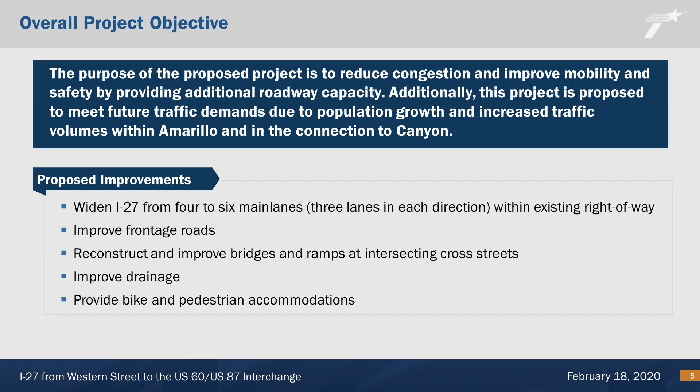The proposed improvements include widening I-27 from 4 to 6 main lanes, 3 lanes in each direction, within the existing right-of-way. Improve frontage roads, reconstruct and improve bridges and ramps at intersecting cross streets, improve drainage, and provide bike and pedestrian accommodations. The proposed project has been divided into 2 sections, a north and south segment.

The north segment consists of 5.1 miles of I-27 from Western Street to south of Sundown Lane. Some of the project considerations for this segment includes Western Hillside intersection alternatives, curbed frontage roads, closed drainage, ramping modifications, bike and pedestrian accommodations.

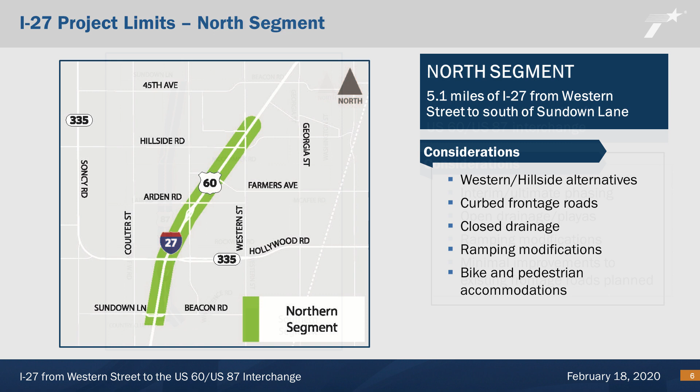The south segment consists of 5.5 miles of I-27 from south of Sundown Lane to south of the US 60 US 87 Interchange. Some of the project considerations for this segment includes interim and ultimate phasing, open drainage or playas, ramping modifications, minimal improvements to existing frontage roads are planned.

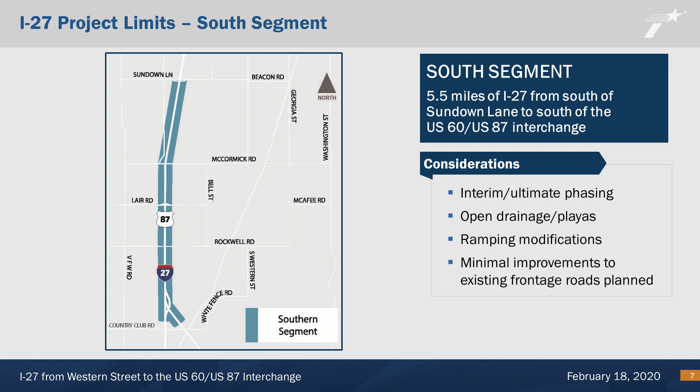The project would be performed in different phases. The interim phase would consist of performing widening work in the median, making entrance-exit ramp modifications, upgrading the frontage road and access in the north segment, modifying the Hillside Western Interchange, and having 6 lanes on I-27 in an interim configuration on the south segment from Sundown Lane to the US 60 US 87 Interchange.

The ultimate phase consists of the completion of widening I-27 to 6 lanes in an ultimate configuration from Sundown Lane to the US 60 US 87 Interchange. In addition, intersection modifications would be performed along I-27 at the Sundown Lane, FM 2219, Lair Road, and Rockwell Road intersections, as well as improvements to the State Loop 335 interchange.

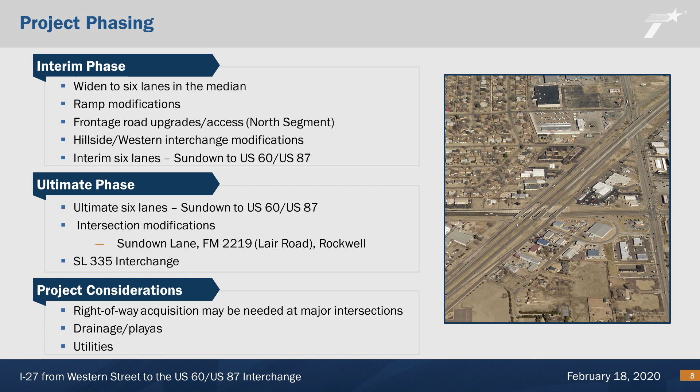Throughout the project, the team will keep the following project considerations in mind. Right-of-way acquisition may be needed at major intersections, drainage or playas, and utilities.

The existing and proposed improvements to I-27 in the south segment, from south of Sundown Lane to south of the US 60, US 87 interchange, are shown here. The existing configuration includes 4 main lanes on I-27, 2 in each direction, and 4 frontage road lanes, 2 in each direction. The existing right-of-way is 300 feet.

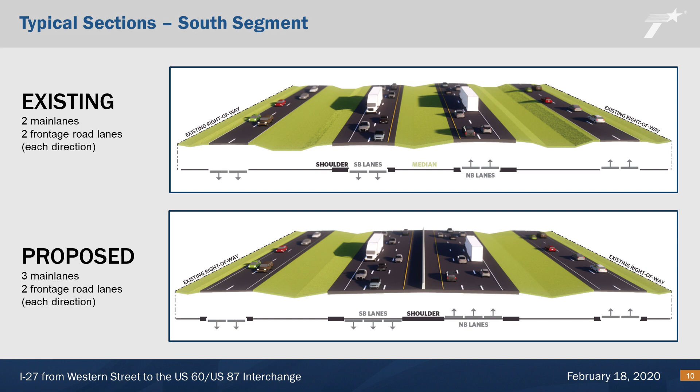The proposed improvements include adding 1 main lane in each direction on I-27 for a total of 6 main lanes, 3 in each direction, and maintaining the same number of frontage road lanes. In general, the proposed right-of-way will remain 300 feet. Right-of-way corner clips may be required at the FM 2219 and Rockwell Road intersections, but we are still evaluating this, and we will know more as the schematic is refined.

One of the more challenging intersections along these project limits includes the Hillside Western intersection. The project team is considering multiple improvement options as viable alternatives for this intersection.

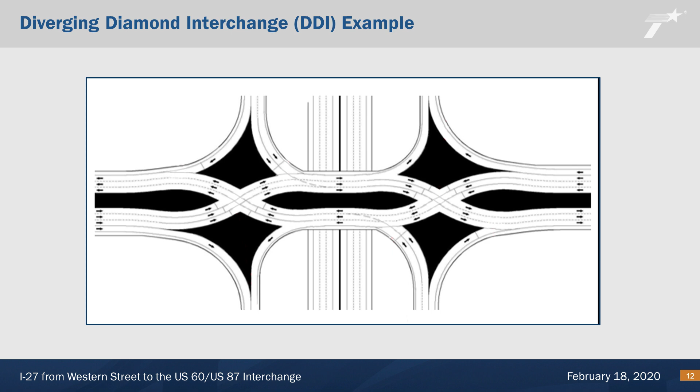One option is the Diverging Diamond Interchange, or DDI. A DDI is an intersection design that addresses congestion by temporarily shifting traffic to the left side of the road, allowing through traffic and left-turning traffic to proceed through the intersection simultaneously. This eliminates the need for left-turn arrows, which allows more flexibility addressing current and future traffic volumes. The DDI design increases safety by reducing the number of potential conflict points between cross-traffic and left-turn movements.

Another option is the Single Point Urban Interchange, or SPUI. A SPUI is an intersection design that addresses congestion by allowing vehicles to travel more efficiently and safely through an intersection. A SPUI operates with a single 3-phase traffic signal. First, cross-street through traffic moves through the intersection. Second, traffic on the first set of opposing left turn lanes travels through the same signal from the frontage road onto the cross street. Lastly, traffic on the second set of opposing left turn lanes travels from the cross street onto the frontage road. Through traffic on the frontage road is handled by using an intersection bypass lane, which allows vehicles to avoid the traffic signal.

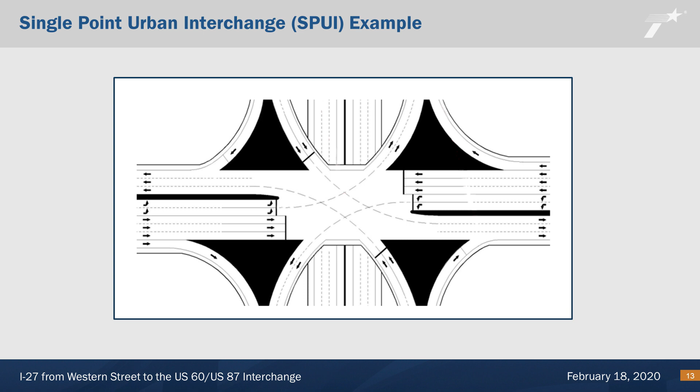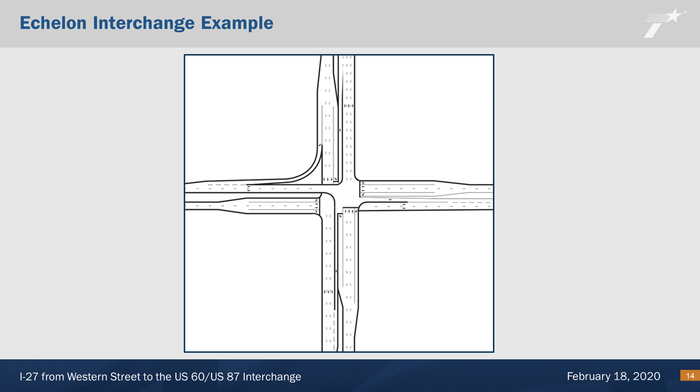These 3 innovative concepts are being considered, along with more standard intersection types at the Hillside Western Interchange, to optimize mobility in this area while minimizing impacts to adjacent properties and the traveling public. All of these examples can be seen in greater detail on the boards with the alternative options specified at the top.

As part of that phase, environmental documentation will be developed, which must meet the specific guidelines established by the National Environmental Policy Act, known as NEPA, and identifies the purpose and need for improvements and examines project alternatives and potential environmental impacts.

In the summer of 2021, our team expects to receive the environmental decision on the project. Later that year, in the winter of 2021, the development of construction plans would begin, with the anticipated start of construction for the south segment in summer 2024. The anticipated start of construction on the north segment is summer 2025. However, there is currently no construction funding identified for the northern section.

Again, the primary objectives for this virtual public open house is to offer you an opportunity to view the design elements for the proposed I-27 improvement project from Western Street to the US 60, US 87 interchange, and to provide you an opportunity to give us your feedback and comments.